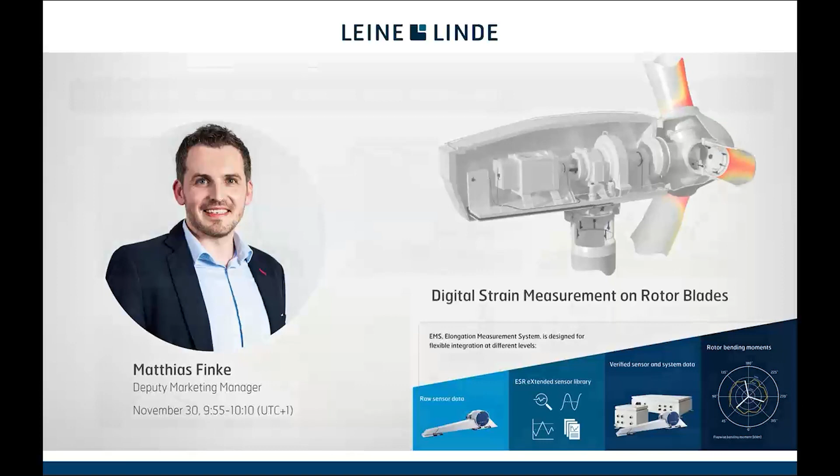And today I'd like to show you our strain sensors, in cooperation with Beckhoff. The strain sensors can be used in various applications where you can expect a tough environment. And of course, in this case, we look into the application for the wind turbine.

Within the area of the wind turbine, we offer a range of scalable solutions, starting from the raw sensor, just the pure sensor, over the library, which is the topic for today and which we provide for Beckhoff TwinCAT, to a final solution, even calculating the bending moments in the rotor. In this short webinar, I will introduce the newly developed ESR extended sensor library, as we call it.

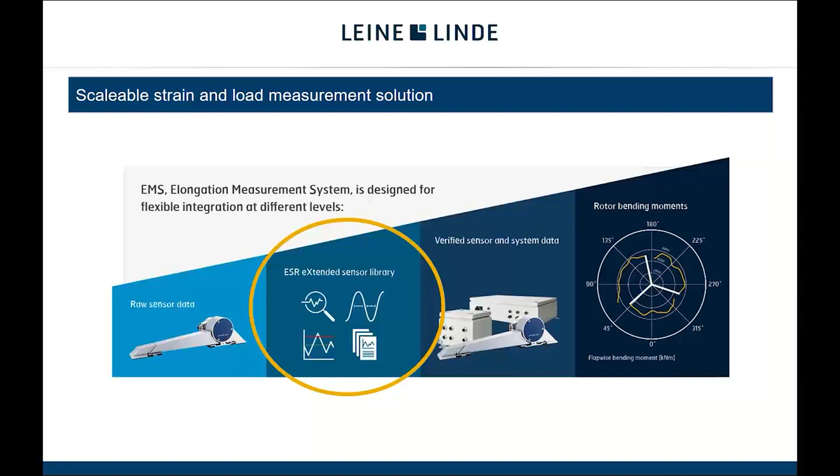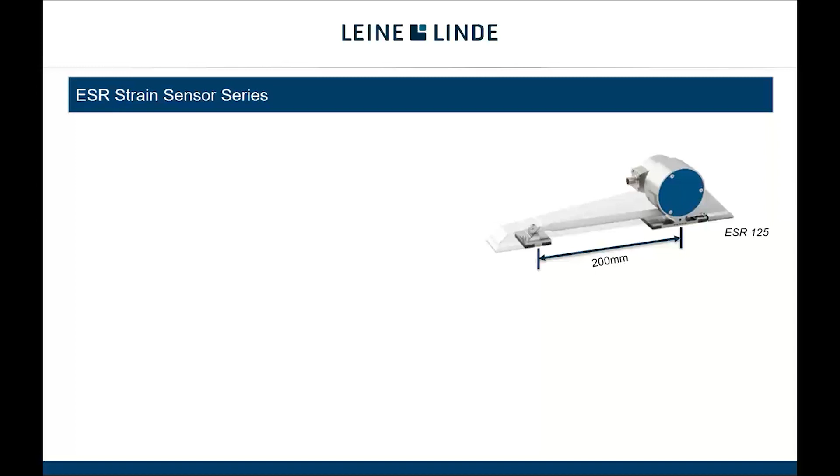Before this, I'd like to give you a short introduction to our sensor technique. The ESR strain sensor has been on the market for about 4 years. It's basically a digital strain sensor based on a rotary encoder, having a measurement beam of 200 millimeters, which defines exactly the length where we measure the strain in the root section of the blade.

The core feature of the strain sensor is a very high resolution in strain measurement, about 0.025 micro epsilon, where classical strain gauges usually have about 0.5 micro epsilon. So it's 10 to 20 times more than a classical strain gauge. And that's in combination with a huge measurement range of plus minus 5,000 micro epsilon.

So even though in the headline we said the sensor can be used for rotor blades out of GFRP, glass fiber or carbon fiber, it can also be installed on many other materials where you can expect a wide range of strain or load. Also, the steel tower of a wind turbine is not an issue.

The advantage which comes with our strain sensor is the inbuilt temperature compensation. The simple but very good idea behind this is that the measurement beam comes with the same thermal expansion coefficient as the object to be measured, so we passively compensate temperature effects. Due to the provided interface, called EnDat 2.2, and the embedded electronics, we can provide strain sensor data up to 30 kilohertz sampling rate.

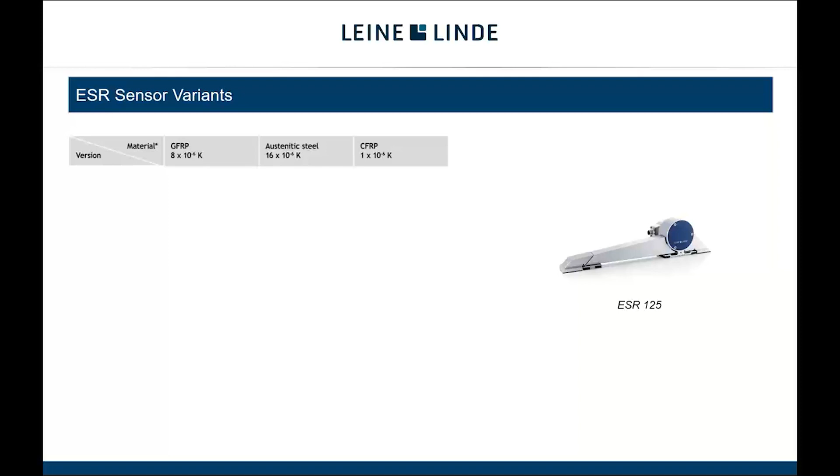In addition, we have different possibilities to install. The classical way of installation in the rotor blade is to glue it to the surface of the blade, but when it comes more to the tower, for instance, we can also screw the sensor into a steel structure. Or, for time-limited measurement campaigns, you can also use the magnet connection, which is very simple to install and done in a couple of seconds.

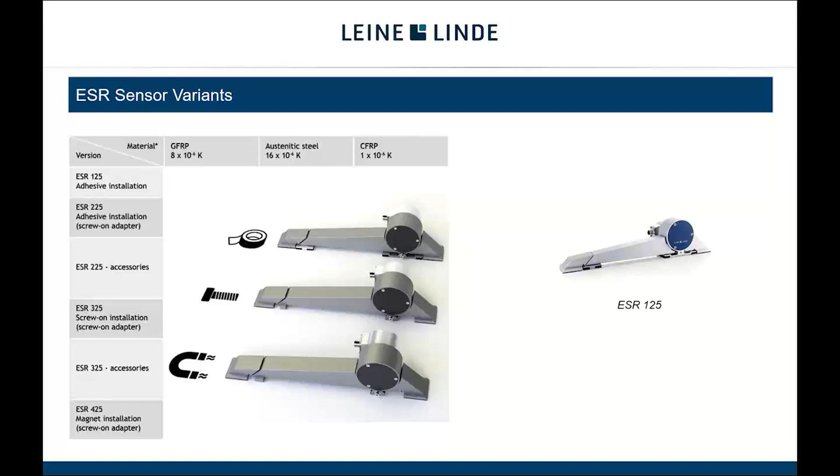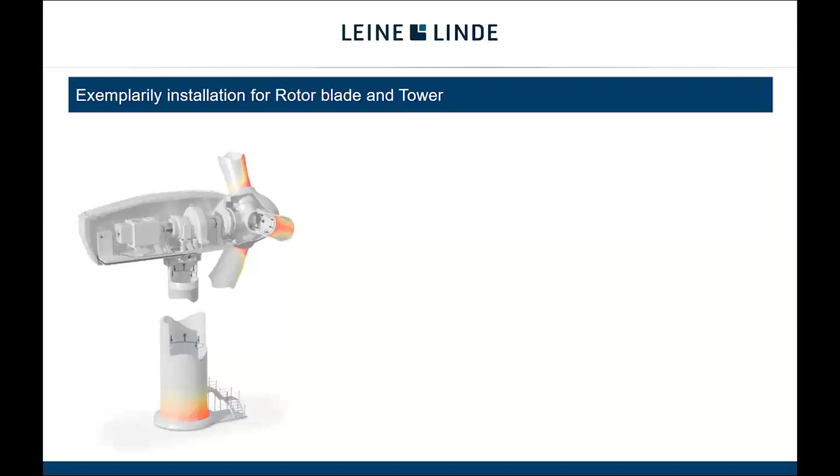If we now look especially at the installation in the rotor blade and also tower, together with hardware from Beckhoff, as an example, you can see here this is for blade bending moment measurement. In this case, you can simply use a Beckhoff IPC series CX5100 together with the EL5032 input card, and by using one input card, you can directly connect up to 2 strain sensors, and you are already with this connection directly in the Beckhoff automation world.

So that makes the installation of the whole setup from the strain signal up to the usage in the control system very easy. And the same goes for the tower installation. No matter if you're in the tower top or tower bottom, you can also use here the same setup using the Beckhoff IPC together with an EL5032, and then you're ready to go.

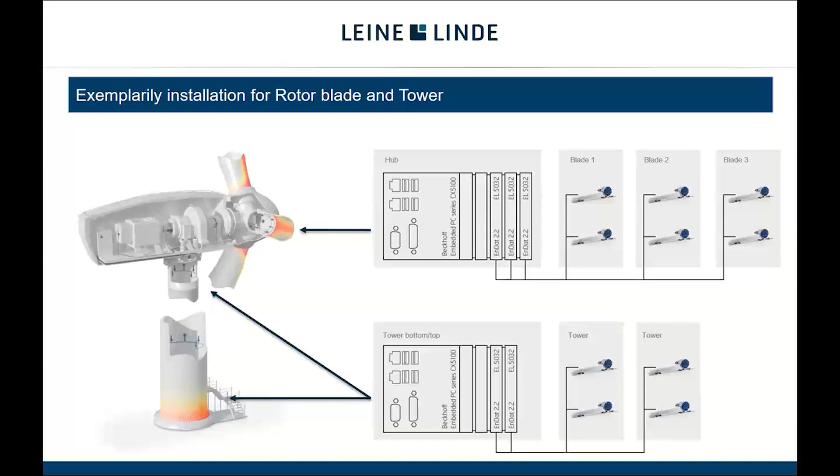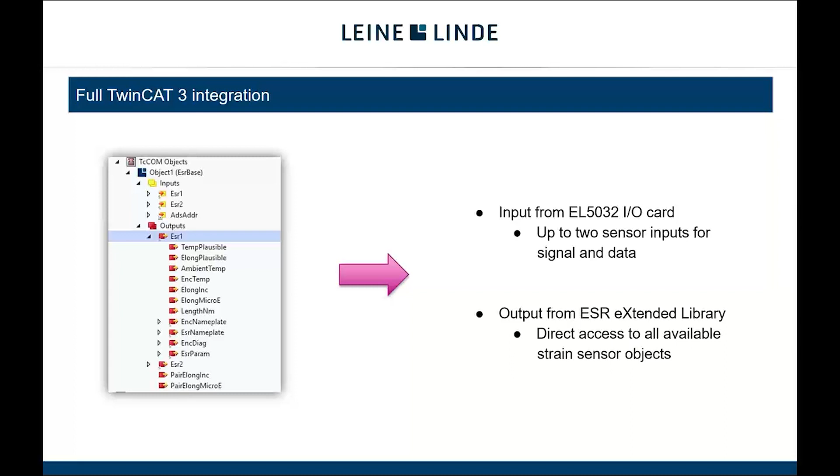And we provide our ESR extended library based on TwinCAT 3 to you. This is a full integration into the TwinCAT world. So all that's required, as mentioned earlier, is the I/O card from Beckhoff, and then by using our library, you get several pieces of information which are either directly out of the sensor or pre-calculated in the project out of this library.

To give a short summary about the input, or especially about the output, we made this library in C++ for TwinCAT 3. So when you're using Windows 7 or Windows 10, this should be possible for you to use. And what you can expect as an output is the real strain information and temperature information in microstrain or even in nanometers, and you also get the local temperature of the sensor.

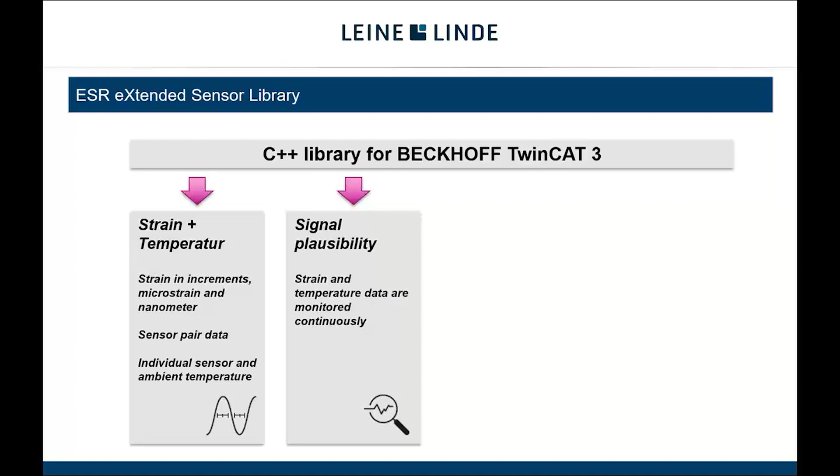Furthermore, by using the library, the sensor signal itself is monitored continuously. So if you have a freeze of the strain sensor, for instance, or of the temperature, this is monitored and highlighted via an error message to your upper control system. And then you have full and easy access, especially to the inbuilt sensor diagnostic. So in each moment of operation, you can have the information from the sensor if it's going good or bad. Especially when you use those kinds of sensors in the control for a turbine in the rotor blade, such information is very helpful.

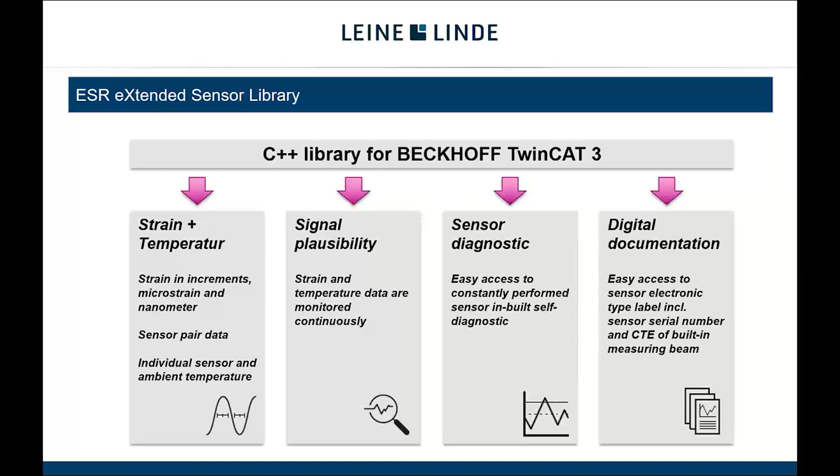And especially for the series installation, but also for measurement campaigns, with this library it's very easy to get the type label information out of each strain sensor. So it's very easy to build up your digital documentation around your project. The gain you can achieve with this library is that you get a full digital chain, which is highly synchronized from the single sensor up to the turbine control system, and even perform integrated condition monitoring with it.

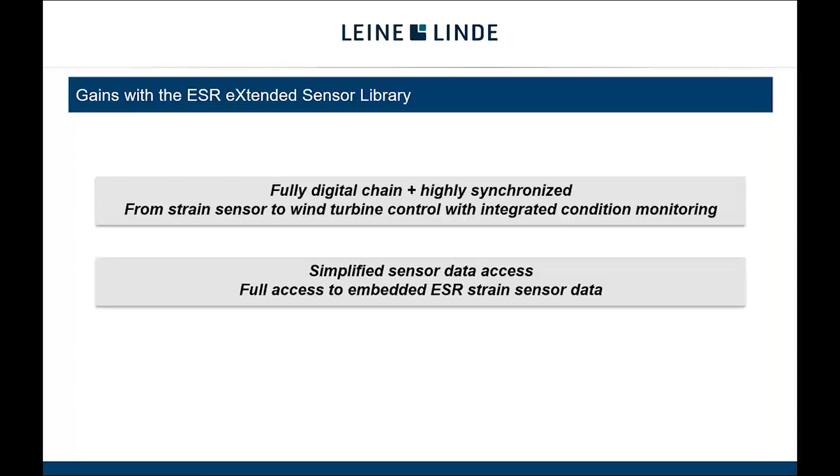You can have very easy data access by using our strain sensor together with the ESR extended sensor library, so you have full access to the embedded information and the pre-processed strain sensor data, where some calculation is done in this library. It also supports your system calibration procedure, and, as said before, performs continuous signal monitoring. So this allows you very simplified and easy access to the data, and also supports you during operation of the system.

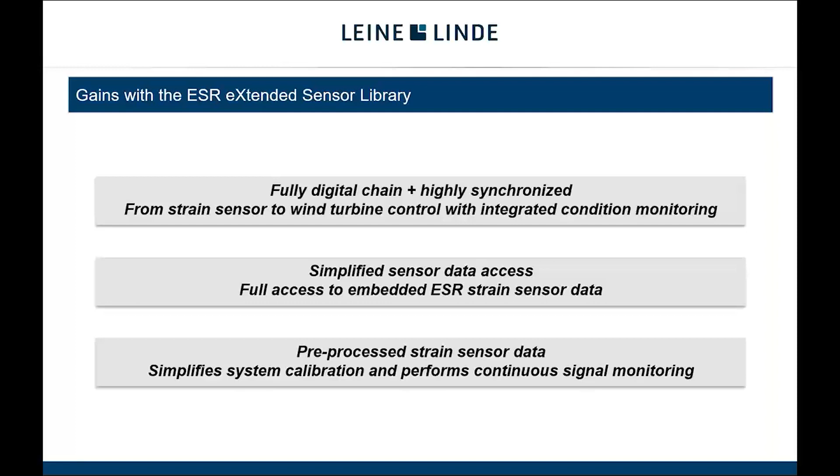If we now look at the different applications where the sensor and library can be used, it is of course obviously for wind turbine control, for individual blade control, where the sensors are installed in the root section of the blade, and by using our components together with a Beckhoff environment, you can provide intelligent control algorithms to reduce the structural loads of the blade, and even on the tower, since the sensors can also be installed in the tower, and also increase the overall energy yield of the single turbine.

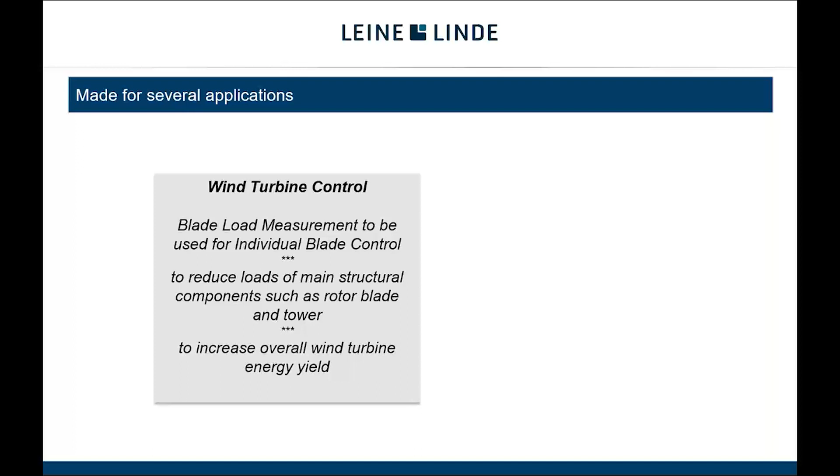Even more, when it comes to fatigue loads, you can also perform structural monitoring and calculate the fatigue loads over the lifetime of the turbine. So as heard earlier, with this type of information, it's also feasible to think about lifetime extension approaches. And besides these fixed installed applications, with a simply installed and reusable type of strain sensor, it's also possible for research and development, and also up to type certification, where we also provide certified strain sensors.